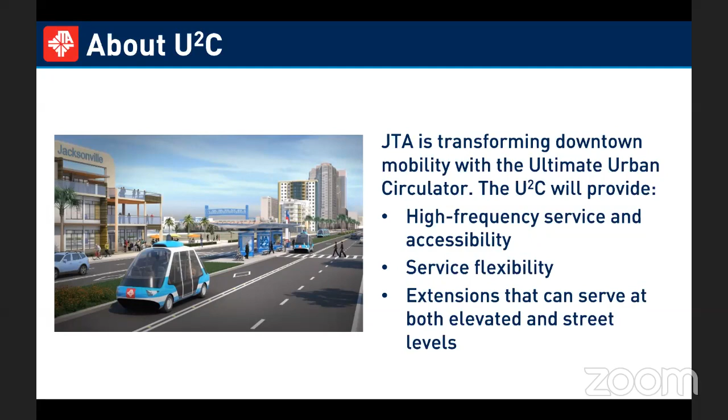So what is the Ultimate Urban Circulator? The U2C is JTA's way of introducing a high-frequency circulator into the downtown and surrounding neighborhoods. It's high-frequently serviced, to help improve accessibility within the core as well as the surrounding neighborhoods, and connect some of those access points. The goal was to figure out a service that would be flexible for future expansion, as well as leverage some of the existing infrastructure of the Skyway. So the U2C would operate on the existing Skyway infrastructure, then transition down to street level or at grade as it makes its way into the extension neighborhoods.

This project, the U2C program, came about through the results of the Skyway Modernization Program. This was a study done back in 2015 where JTA engaged the public and asked a series of questions about the Skyway and its future, as well as doing an in-depth analysis of some of the issues currently happening with the Skyway. As a result, they identified that we needed to address some of the system deficiencies of the Skyway: the vehicles were no longer being manufactured, it was becoming very costly to upkeep and even challenging to fabricate some of the parts ourselves. We also had a lot of feedback saying that the Skyway didn't ever reach where it was supposed to go.

So we really wanted to improve the system and improve those modal connections, as well as those transfer points between the local bus services and the Skyway, and also help support the city's goal of economic development in and around downtown.

So after all of the analysis, the JTA board gave us the direction to keep, modernize, and expand the Skyway. The primary way of doing this was replacing the vehicles, and what came to the top was autonomous vehicle technology as the replacement for the Skyway vehicles.

So we're phasing this project out. Some of you may know that the first phase being advanced is the Bay Street Innovation Corridor, which runs along Bay Street from the central station of the existing Skyway to the sports and entertainment complex.

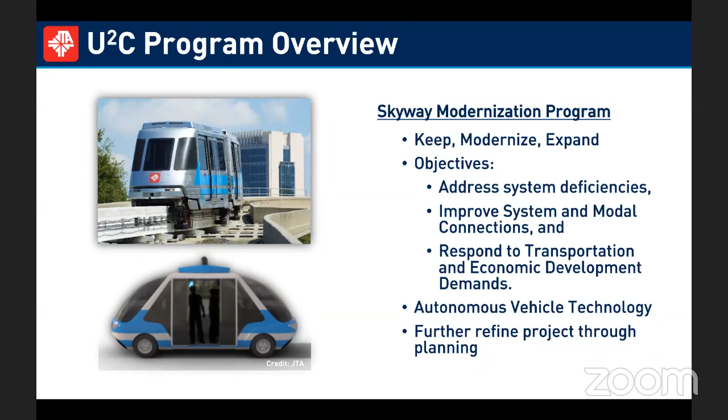And then as we plan these extensions, we're further refining these corridors, so there's flexibility in planning.

So the goal, or the ultimate output of the U2C program, would be to expand the existing 2.5-mile elevated Skyway system into a 10-mile system that utilizes both elevated and at-grade features throughout downtown and surrounding neighborhoods. Being able to connect to surrounding neighborhoods without putting a large amount of intrusive infrastructure in is really helpful, and that helps the program be very agile and able to adjust to certain demands within those areas.

Again, leveraging multiple public investments, we'll utilize the existing Skyway infrastructure. It'll connect to both the Jacksonville Regional Transportation Center and the previous transit station at Rosa Parks, utilizing all of the existing Skyway stations. And we'll coordinate with the DIA and the city on a lot of their investments in the downtown area. In its entirety, it will develop an autonomous transportation network.

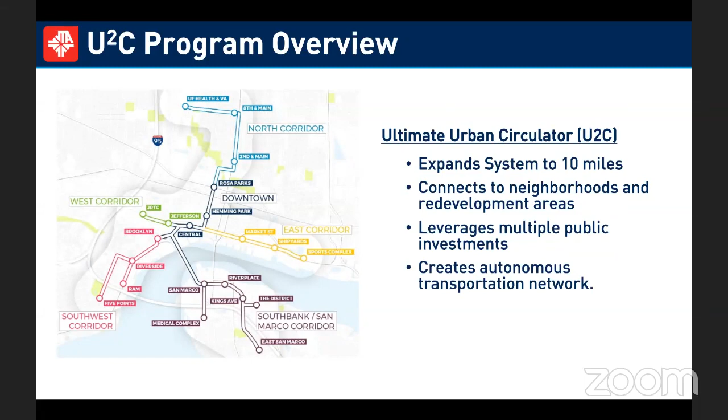So surrounding this is this concept of transit-oriented development. Transit-oriented development, or transit-supportive urbanism, falls in the smart growth category. The ultimate goal is to create a more sustainable form of development in which you incorporate a mix of uses, including housing, office, retail, as well as other amenities, which help cater to the needs of active transportation users, including walking and biking, as well as transit users.

So transit-oriented developments are usually centered around a high frequency or premium transit service, and it extends into the area of about a half mile. Within that, there'll be all sorts of amenities, including complete streets features, pedestrian-friendly infrastructure, as well as connections to and from all of the areas to make it easy or accessible. It really de-emphasizes the need for personal automobile use within the area, as well as the ability to travel between TOD nodes using transit.

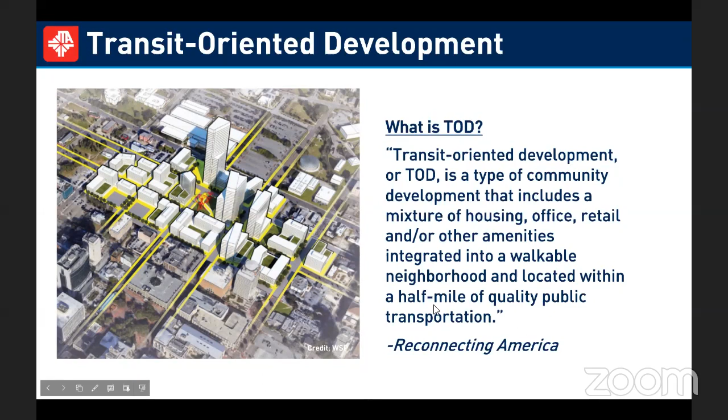So I do see a question that came in: what will the stops look like? The stops are still being designed. The test and learn facility had just a standard transit stop. The nice part about using a...

...vehicle that can utilize the regular roadway is we can use something similar to our existing BRT stops, something with a little bit more technology involved though. We have live headway times and stuff for our BRTs. So some live information, totems, things of that nature would make it a little bit more of a technologically advanced stop compared to a traditional bus stop.

But it's still being designed. So TOD really ties into JTA's mission. We're really just trying to improve mobility for Jacksonville and the surrounding region, and especially helping improve economic opportunity. So a project of this scale has the ability to draw both investment from technology as well as developers, bringing that development back and helping support the city's goal of reinvesting in the downtown and the surrounding neighborhoods is a big portion of this.

And then again, bringing that sustainable growth pattern back to Jacksonville, where right now we're seeing a lot of developers moving out to greenfields and developing further and further out, causing more sprawl, which then leads further to congestion and things of that nature. So really just re-centralizing and trying to create a more sustainable development pattern.

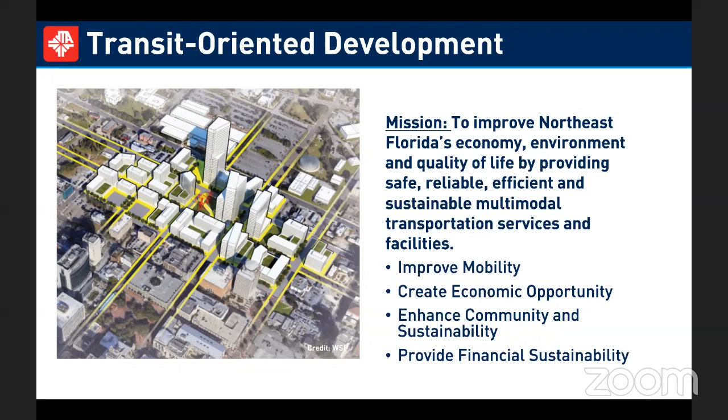So moving forward, the plan kicked off early this year. Started with our project team doing a deep dive into some of the existing conditions within the corridors. This started with on-the-ground work. We did a lot of site surveys, took some pictures, did some data dives, and really all of this was utilized to then build out our existing conditions analysis.

From there, we were able to start to develop a preliminary TOD desirability and readiness assessment of some of the proposed stations, and that's what we'll be sharing with you today.

We just want to get some feedback on some of the thoughts about what typologies were used and some of the data we share, and if the community feels the same way about those.

From there, we'll then begin to refine those station area plans in our task 4 section, which is station area planning for 6 of the selected stations. We'll come back for some more public engagement once we refine those stations a bit, and then get some public feedback to finish driving those stations towards completion.

And then finally with task 5 is how do we actually achieve that TOD at those stations? That'll outline some of the important tasks or steps we'll need to do, whether it be policy or community engagement, to make those a reality. And then we'll do one final round of public engagement towards the end of the year.

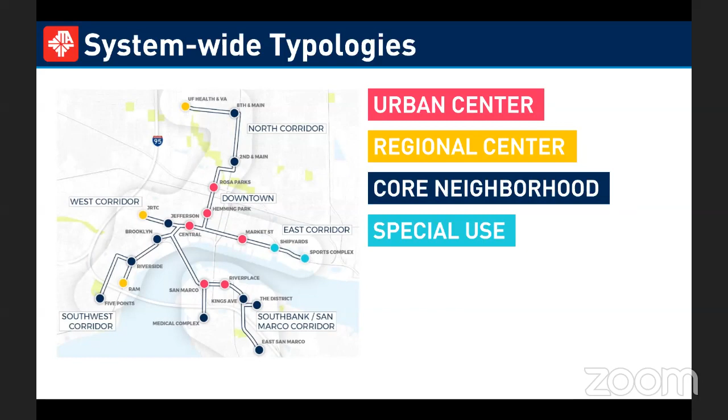So talking about Riverside Arts Market, or RAM, while it's clear this isn't a central business district, it certainly has a legacy of attracting employers. And while the office stock is on the older side, at the Riverside Station you have the new office tower that's well underway in the planning process. So we think there's still an opportunity for this to be a place of employment, perhaps focused on finance, and of course the Riverside Arts Market is certainly a destination in itself, and a regional draw that puts this little neck of the woods on the map.

Just some imagery—you have the Riverside Arts Market. It's a great use of space under the freeway, I-95. It is certainly a very large and formidable piece of infrastructure. Any way that you can use urban design and programming for spaces like this, in the successful way Riverside Arts Market has, is definitely a good thing. And of course, a cultural asset just south of the freeway, still within striking distance of this regional center place that we're seeing.

So to round out the other places in the Southwest Corridor, under the typology of core neighborhoods, we see a couple different types of places. Historic and urban—you can think of Springfield, you can think of San Marco, the square in San Marco, and certainly the Five Points neighborhood and the Park Street commercial corridor.

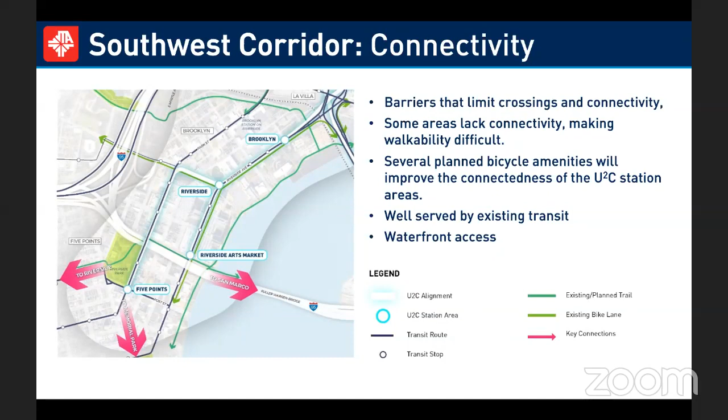So moving into talking about these stations in a little bit more detail, and through the lens of our TOD assessment, I want to talk about the metrics that we use when we think about these stations and try to evaluate the potential for TOD.

We get an understanding for the local leadership. We take a look at the station area market strength, and again, it's really looking to what's coming online, what's in the pipeline, are developers and people moving to the area or wanting to build in the area. It's a good indicator for what is potential.

Also, physical suitability speaks to the availability for new TOD. That can take the form of literally a lot that's vacant, or maybe an older strip center that is very car centric. Is that the highest and best use for that? Could that be reimagined as something a little bit more urban and walkable and pedestrian friendly?

And then we want to understand what the plans are that are in place now as a guide to the planning that's been done, and really the legacy of these places. It's really our starting point, and we look to those places as a guide. Some areas have more than others, so that's really where it helps to gauge our approach.

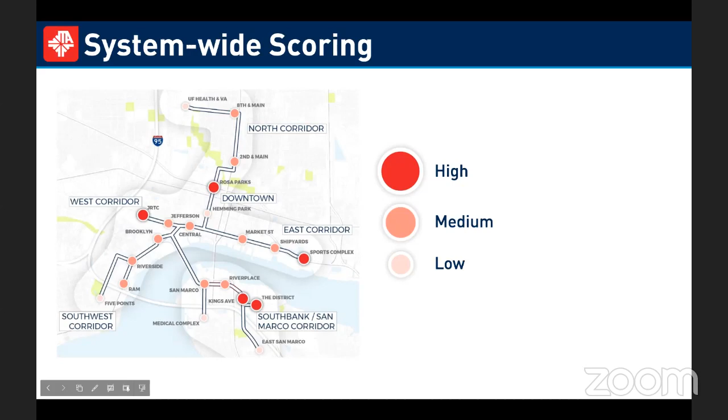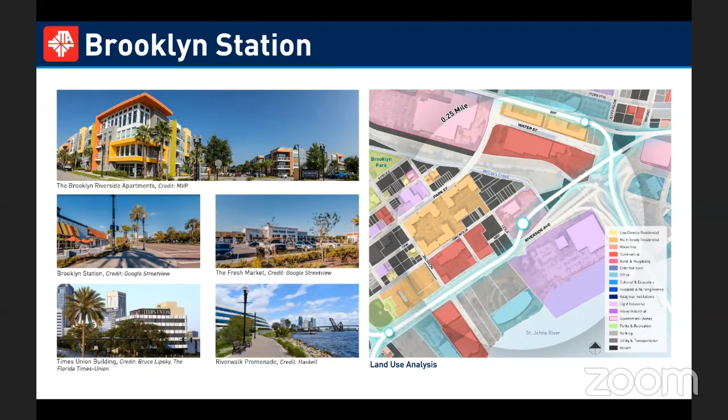So working our way from north to south, talking about the Brooklyn Station, we spoke about the new development at the Brooklyn Station area. This is a land use map on the right. At the waterfront there's some non-residential or non-commercial uses, like the Haskell office. The Times Union site has a plan now for how that could be reimagined as something more mixed use in character. You also see the darker parcels—those are vacant parcels, and there's one pretty close to the station. There are also vacant parcels along Park Street, which will be an important point as we move forward. Next slide.

So overall, we think the Brooklyn Station area ranks fairly high, higher than most, across the four metrics that we look at. Really important to point out is the local leadership, both falling within the DIA's realm of downtown, but then also JTA providing really critical and key leadership to support and drive the vision for economic development. Next slide.

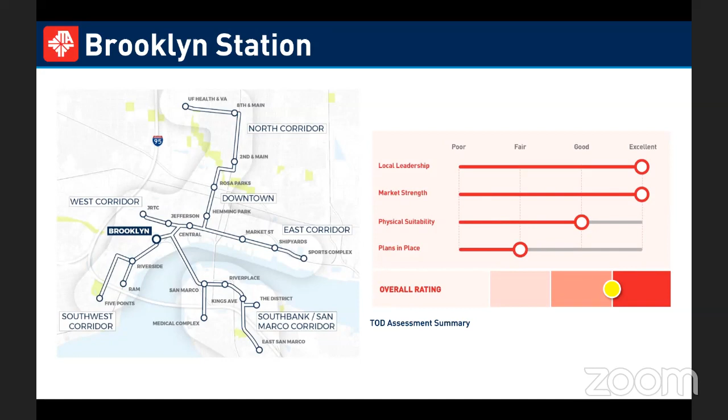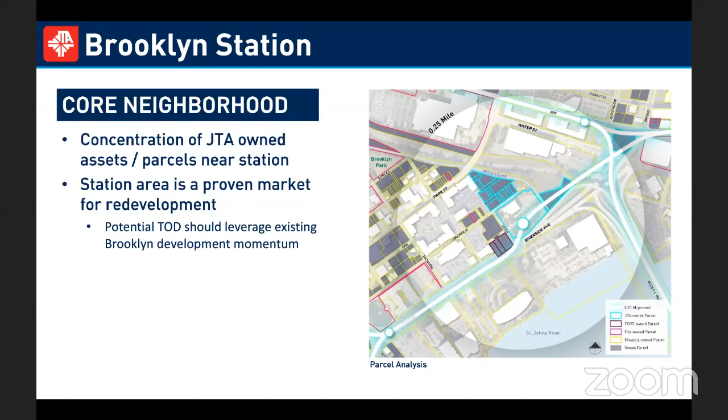So connecting that back to the JTA, around the station area there's a concentration of JTA-owned property, but then also other publicly owned property. When we think about the opportunity for TOD, a lot of times property held publicly is easier to get going sooner, or less complicated than property held privately. So we always look for those early wins or initial phases—if new development should happen around this station, where can it go first? And then, of course, the whole area is really a proven market for the type of development that has a lot of the characteristics of TOD, so we would want to capitalize and build upon that momentum. Next slide.

JRTC, which we're not focused on today, isn't really a direct connect, it's just due north, kind of northwest. We really see Park Street as a critical connection between La Villa and the JRTC hub, and then pointing southward, so Brooklyn, connecting right into 5 Points.

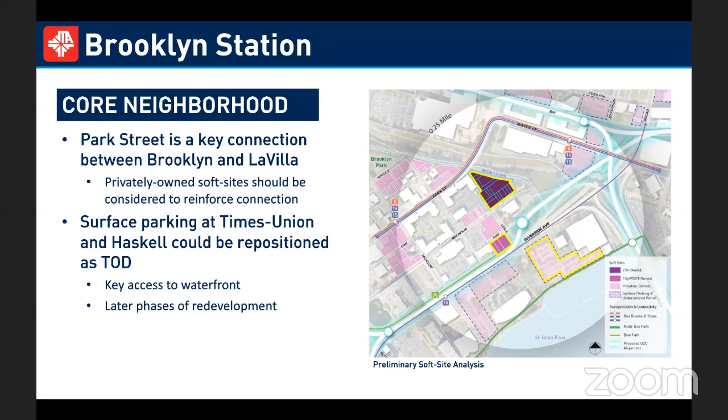We see that there's opportunity for vacant property that could be pulled into a larger vision for TOD. You see that darker purple triangle, that's an assemblage of parcels owned by JTA. We really think that could be an opportunity to complement the development that's happened around the station area, and really be a catalyst for how this station area can continue to add new residences and amenities for everyone. Next slide. So moving on to Riverside, very close to the Brooklyn station.

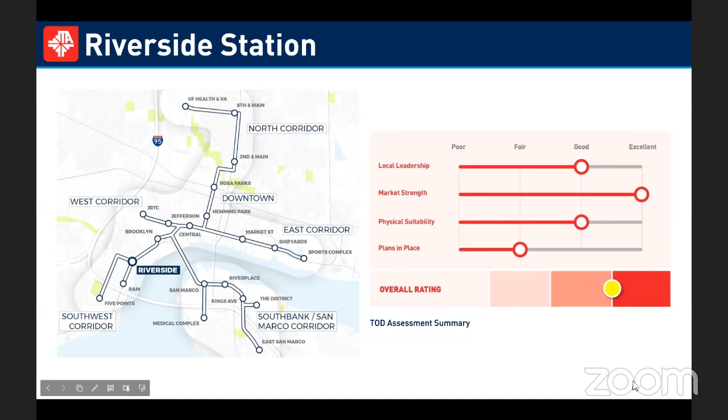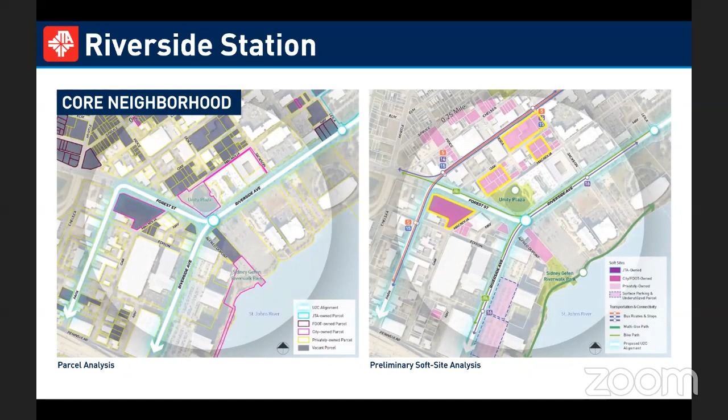So we continue to see, like Brooklyn, these two stations really being able to continue the momentum of development that's occurred. But in this image on the right, you see all those pink parcels and yellow squares - that's part of the Park Street story. Is there a way to have maybe a different type of development that's not large multifamily buildings, but maybe reuses older buildings with smaller, 2 to 3 story commercial buildings - building up that Park Street frontage to reinforce that really important connection to La Villa. Next slide.

Riverside Arts Market, if you can go to the next slide, this is part of an area that has quite a bit of employment potential and existing employment. There's not a lot of easy places where we could suggest TOD to go. You see in the image on the right, there's 2 large squares - I wouldn't call them surface lots, they do have some grade changes with them, so it's a little more complicated.

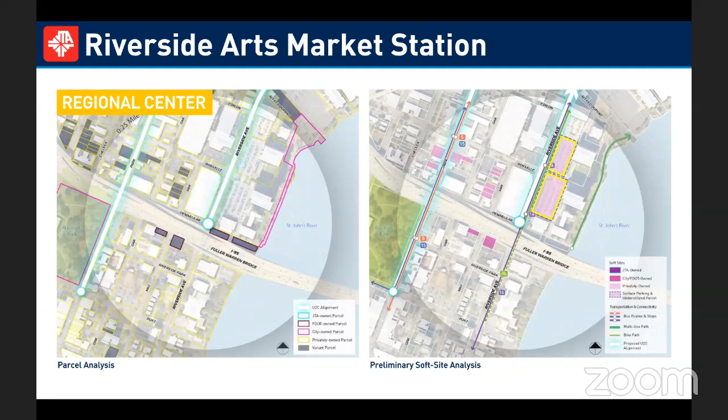But when we look at a place like this and think about what's possible, maybe there could be some type of shared structured parking, and new development that helps reposition those older office buildings and reinforce this area as an important part of the regional employment, and also continue to play up on its cultural assets like RAM and Cummer Arts Museum. Next slide.

Finally, 5 Points. Just before we go to the next slide, I do want to say that from a local leadership and market perspective, 5 Points scores very highly. This is a place that if I was headed to Jacksonville, I would want to move to a place like 5 Points. It's really an ideal urban neighborhood that's very desirable.

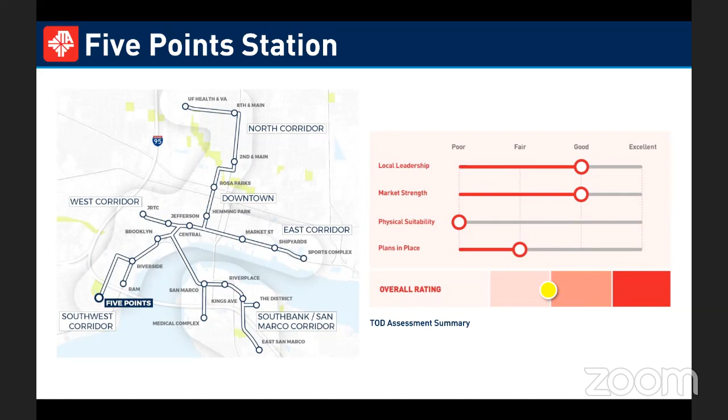Where we don't think it scores so well - if you can go to the next slide - is realistically, around the station area, with it already built up so much with single family homes and the rich commercial corridor along Park Street and Riverside Park, where are there opportunities for TOD type development? In this area there's already some newer apartments that are fairly dense, and it does add to - I've certainly felt a bit crowded - just those areas east of Park Street. There's also really smart development, like that new office development, very small scale, a shared space that has the restaurant on the ground floor. Those are excellent examples of infill development. So we see it's fairly limited to what's possible here.

And when we think about the entire system, and if we were to move just a handful of stations forward and develop visions for TOD, where are the priority stations? We think that 5 Points is already in a really great place, and really should be looked at as an example of good infill development.